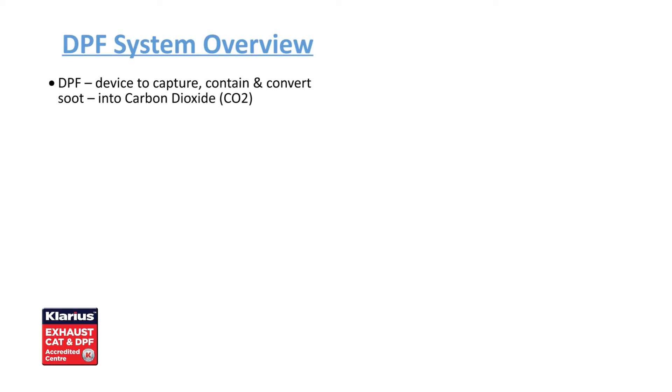Before we do, let's have a quick recap about DPFs, diesel particulate filters. As mentioned earlier, it's simply a device fitted to the vehicle to meet Euro legislations that contains and periodically burns away particulate matter and converts it into CO2. But what is particulate matter? It's actually the unburnt fuel from the combustion process on the vehicle. It's really tiny, called PM10 down to PM2.5 size, about a fifth the size of a human hair.

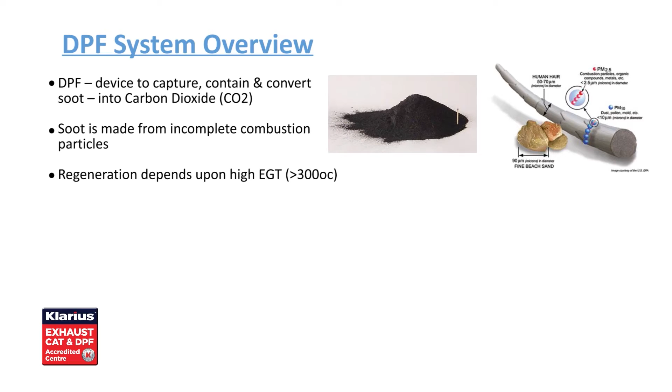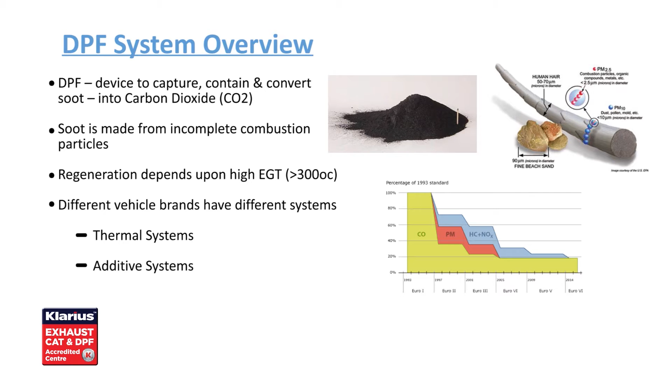Also, we need to consider regeneration. This can happen in both a passive nature or an active nature, depending on exhaust gas temperature. Finally, just a reminder that the DPF was introduced to suit Euro 5 emissions standards, where particulate matter had to be controlled to a much tighter level for the introduction of this 2009 series, down to 0.05 parts per million. So now let's talk about the different systems available on different manufacturers of vehicles.

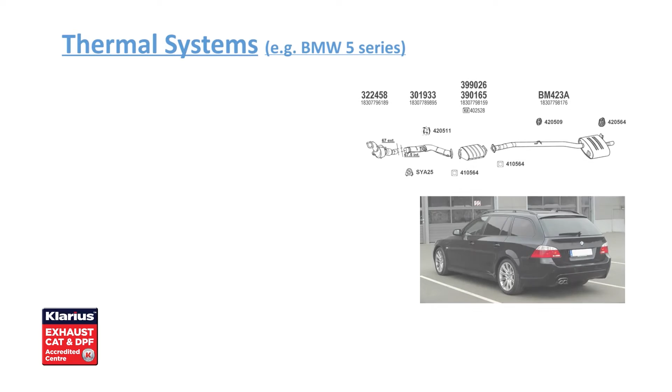First, I'd like to talk about thermal systems, and we'll particularly pay attention to this BMW 5 Series 2008 model E60, the 520 diesel. You can see from the diagram that the catalytic converter and the DPF are completely separate units. The catalytic converter is mounted nice and close to the exhaust manifold on the engine, so it remains at high exhaust gas temperature, but the DPF is actually located underneath the gear stick region of the vehicle, in the middle of the vehicle.

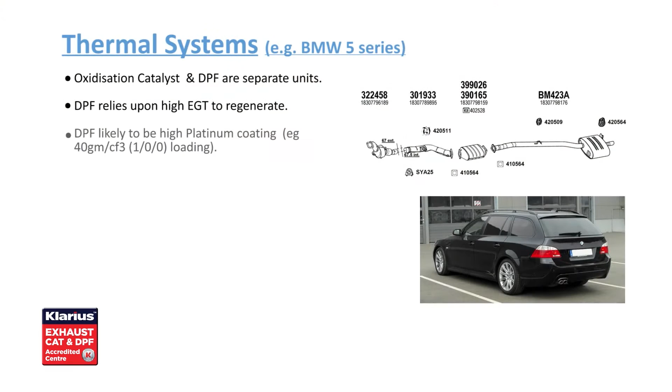So how's it going to regenerate? It relies upon high exhaust gas temperature, so we want to be using this vehicle on the motorway, going up and down, typically 300-700, which supports passive regeneration. If that's not happening and we get to a fill level where regeneration has to be done actively, fuel will be added into the exhaust gas stream to enable a combustion process to take place. But to support the passive regen, it's likely these DPFs have a high amount of platinum loading on them, which supports the conversion of particulate matter into CO2.

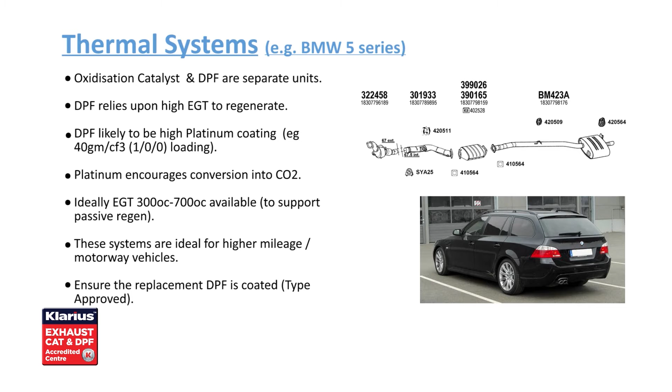It's a good point to remember that replacing this sort of DPF with a type-approved device is highly recommended to ensure that there's a platinum coating on there as well.

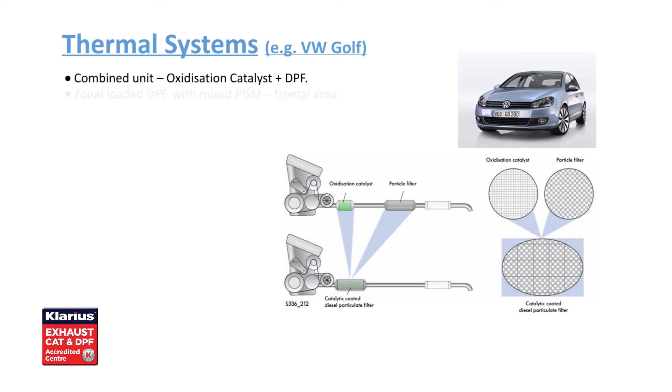So let's talk about a different thermal system. Volkswagen have come up with a very innovative solution to the problem. First, they've combined the separate catalytic converter and DPF into one complete unit. They've done away with the catalyst brick and kept the DPF brick, but it's what's called zonal loaded. So the front half of the DPF brick, which is generally empty, now has a precious metal coating and is acting as the catalytic converter - a mixture of platinum, palladium and rhodium. The back half of the DPF brick is doing the function of the DPF, containing and periodically burning away the particulate matter. I'd call this a zonal loaded DPF, and it's used commonly across many of the VW platforms.

Particulate matter is burned away easily using temperature, so it's located nice and close to the turbo manifold, but without any additive system.

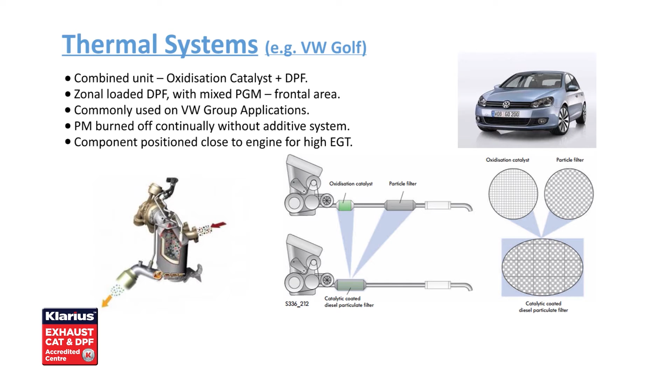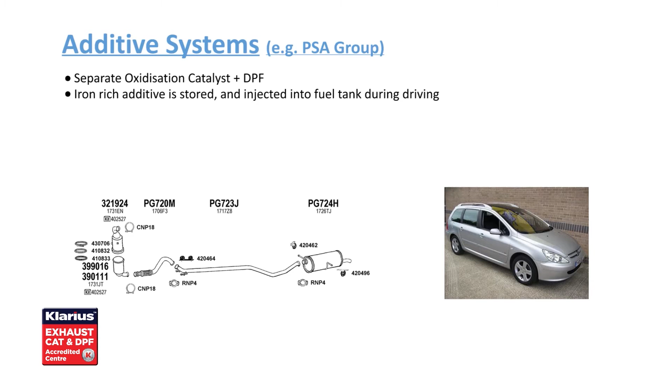Finally, we'll talk about probably one of the most commonly faulty systems on vehicles: the additive system. This is where a separate catalyst and DPF are used, but additionally there's a reservoir with a fuel-borne catalyst that has to be added. It's in a separate tank and is periodically injected during driving. So what does it do? It actively lowers the combustion temperature required for regeneration, so it can support passive regeneration, and it can make active regeneration occur at lower exhaust gas temperatures.

This additive is stored in a separate reservoir or tank, but it needs to be replaced periodically. It's around 3 litres and tends to last between 60 and 75,000 miles. But if it runs out, the vehicle won't be able to regenerate, and very quickly the DPF can fail. So normally this is when a garage would be alerted to the system needing replenishment at the same time as the DPF needs replacement. The fluid actually becomes a service item. It's very commonly used on the PSA group engines, seen in such vehicles as the BMW Mini, Peugeot, Citroën, Volvo, Mazda, and in fact some of the VW, Skoda and Lancia families.

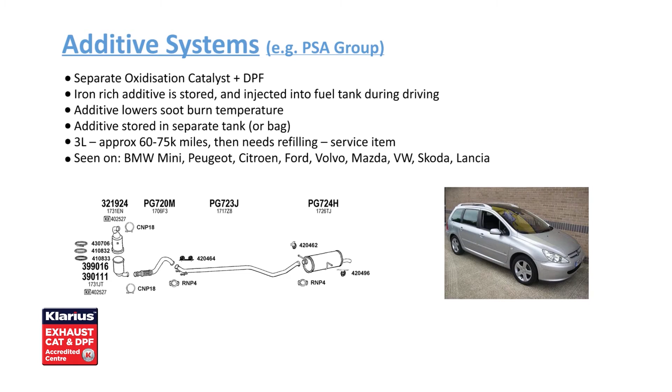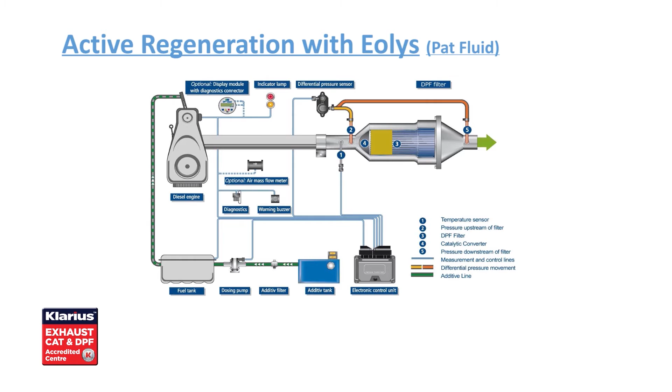Let's take a look at this example. This is off a Peugeot 307, and we can see the catalytic converter brick up at the front, and in the same assembly we can see the DPF brick at the back. You'll see on the schematic some of the common features: we've got pressure pipes both fore and aft, so we can start to measure the pressure differential across the brick. We've got temperature sensors, and elsewhere on the vehicle things like the oxygen sensors and the ECU control unit. All of these different items and components help to manage the DPF system.

Additionally, on these additive systems, we've got the reservoir where the additive itself is kept. This needs to be periodically pumped into the fuel tank.

This goes through an additive filter and through a pump and is periodically dosed. These are the additional components over and above the normal DPF pieces.

Let's talk a little bit about the PAT fluid. You'll hear different names actually - there's PAT fluid, Eolys fluid. Eolys is the original equipment brand name.

The system capacity is about 3 litres. It depends which vehicle you've got, but generally they're around 3 litre capacity. The replenishment can either be done through buying original equipment fluid, or you can buy an aftermarket alternative.

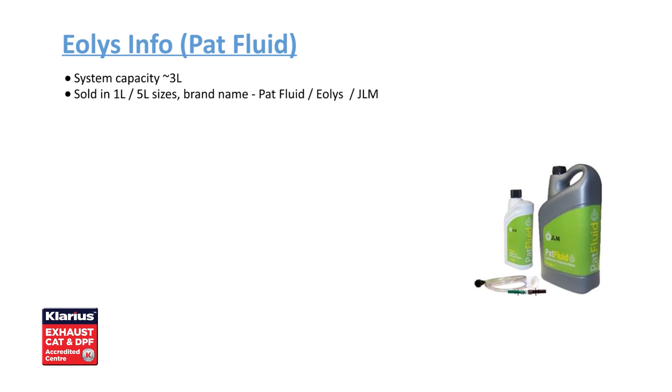Let's talk about the aftermarket fluid. It's available in 1 litre and 5 litre tubs. What you must always remember is this is a universal aftermarket fluid, one-stop shop, so one brand does every single original equipment manufacturer specification that there is. It's suitable for all vehicle applications, both light commercial as well as passenger car from 2000 or newer.

It's basically a low-cost, fuel-borne catalyst. It aids regeneration in the DPF filter, it lowers the combustion temperature of soot buildup, and it enables quicker burn-off of soot particles for passive regen.

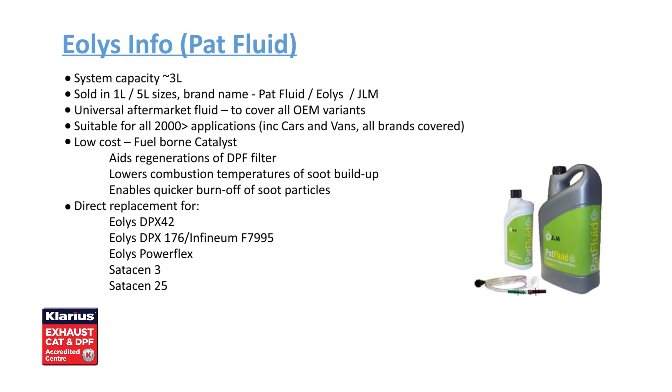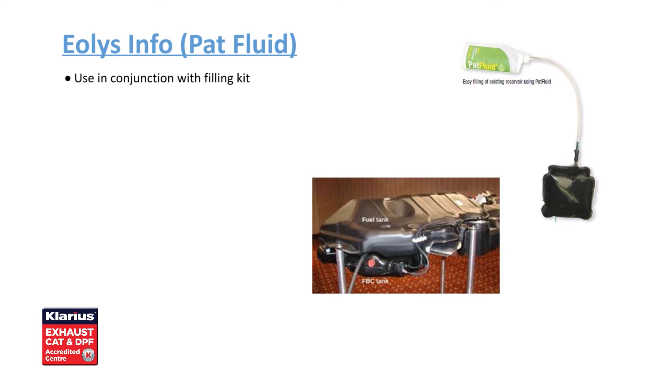We'll talk a little bit now about replenishment. Replenishment can be done either on or off the vehicle. It must be done with the filling kit, the pipe and the little connections that are needed to go from the reservoir decanter into the reservoir itself.

You always must fill from a 1 litre container. So generally, if you're going to replace around 3 litres of fluid, you decant from the 5 litres into 1 litre and then into the reservoir tank, and you repeat that exercise 3 times in a row.

Filling is normally on demand, so that could be either as a service interval item. If the vehicle owners come in at say 60, 70, 80,000 miles, it's a good time to check and replenish this fluid. If not, it's done on demand of failure.

If the DPF has failed due to lack of fluid on the vehicle, where the DPF can't regenerate and becomes blocked, not only will you need to replace the DPF, you'll have to replenish this fluid as well at the same time. It can be done either on or off the vehicle, whether it's into the reservoir tank or reservoir bag, but always in conjunction with the filling kit.

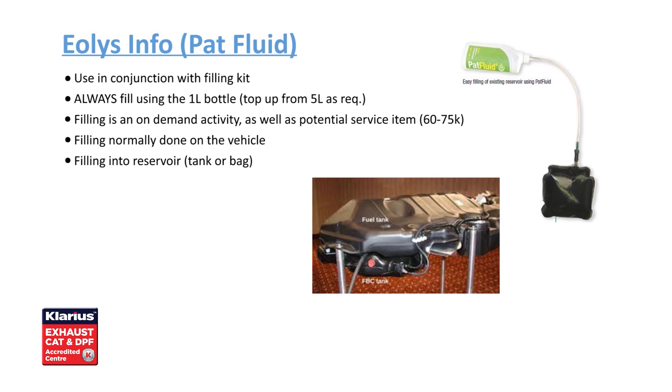Let's talk about some of the common causes of lack of regen. I'm going to split these up quite nicely into 2 families, whether that's either mechanically or down to poor servicing of the vehicle or user contributed issues.

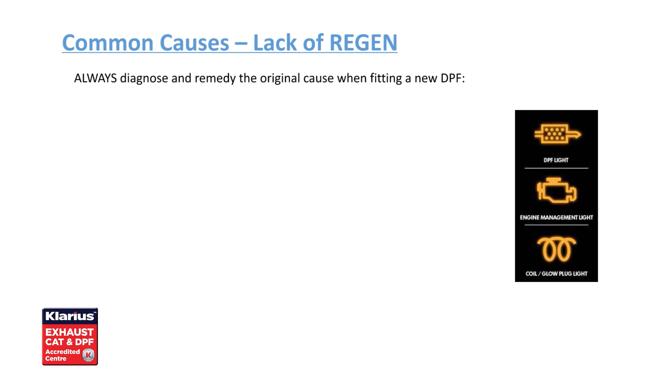First of all, let's talk about mechanical things. There's a number of items on the vehicle that, if either poorly maintained or leading to failure, will cause the vehicle to stop regenerating. If you're replacing a DPF, you should always diagnose and fix these issues at the same time. Some of the common ones could be a faulty or sticking EGR valve, heater plugs...

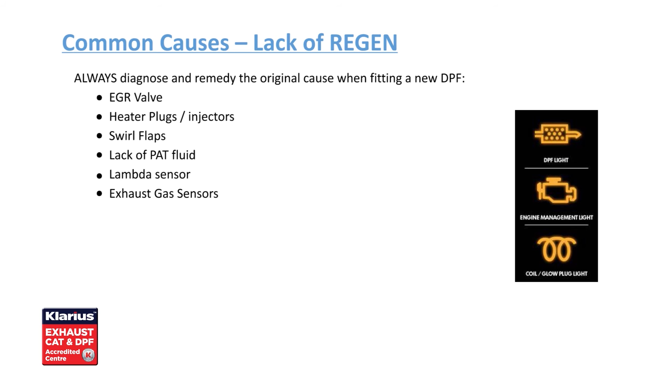...or injectors or their control unit, it could be swirl flaps, it could be down to lack of PAT fluid on the vehicle, it could be faulty lambda sensors, faulty exhaust gas sensors, it could be down to a poor quality catalytic converter or DPF with particular lack of platinum on the DPF, it could be down to turbo issues, or it could be down to the pressure pipes.

These could be cracked, perished, or blocked, or full of condensation. It could be down to the pressure differential switch.

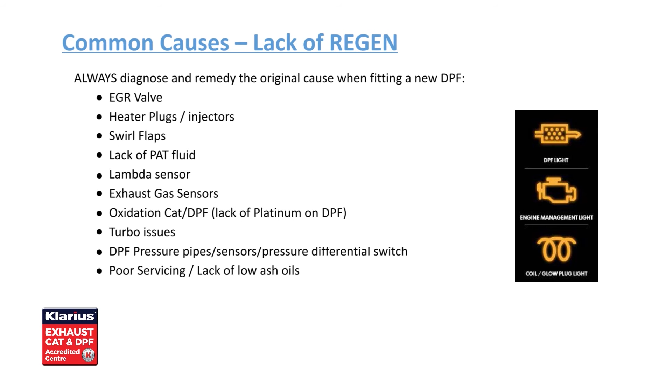Also, look at servicing, look at the history of servicing on that vehicle. Has it been done on time? Has it been done using good quality components rather than cheap products? I'd also be interviewing the owner of the vehicle and trying to start to understand how they've used this vehicle.

Driving style is really key to the DPF. We need high exhaust gas temperatures and we need regens to be taking place either passively or actively. If that's not able to happen through the driving style from the owner of the vehicle, the DPF can quickly become blocked. So some tips from me.

Avoid short journeys. We need the engine to be going up to full operating temperatures to support passive regen. We need high exhaust gas temperature to be used. So if you're only going to be using the vehicle around the town, you might want to recommend to your customer to go for a 10 or 15 minute drive once every couple of weeks up the highway, maybe in 4th gear, and get to a reasonably high exhaust gas temperature.

I'd also be asking about fuel quality. Have the correct fuels been used for the vehicle, particularly low sulfur fuels? When we're talking about servicing, we want to make sure the correct oils are used. Always use the manufacturer's recommended oils, but generally for DPFs, we need to use low ash engine oils.

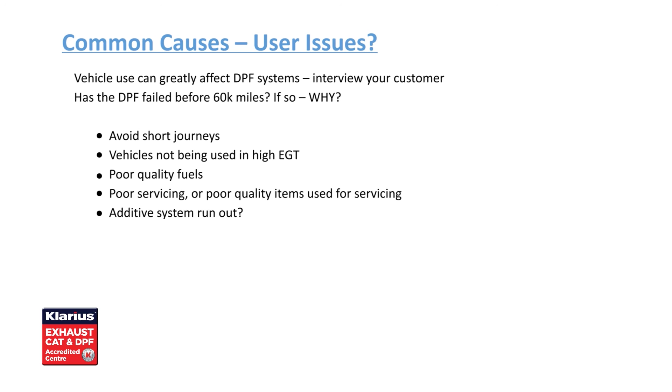Ask them about the additive system. Have they ever had a replacement or replenishment of the fluid? I don't know if you're aware, but if the fuel tank is below around a quarter full, maybe around 20 litres, the DPF won't be able to regenerate.

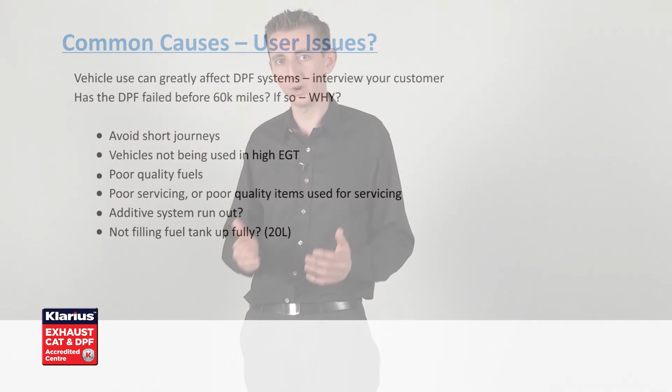So if the vehicle owner is running the car particularly empty or never replenishing the fuel fully, this will stop regeneration happening as well. Thanks for listening.